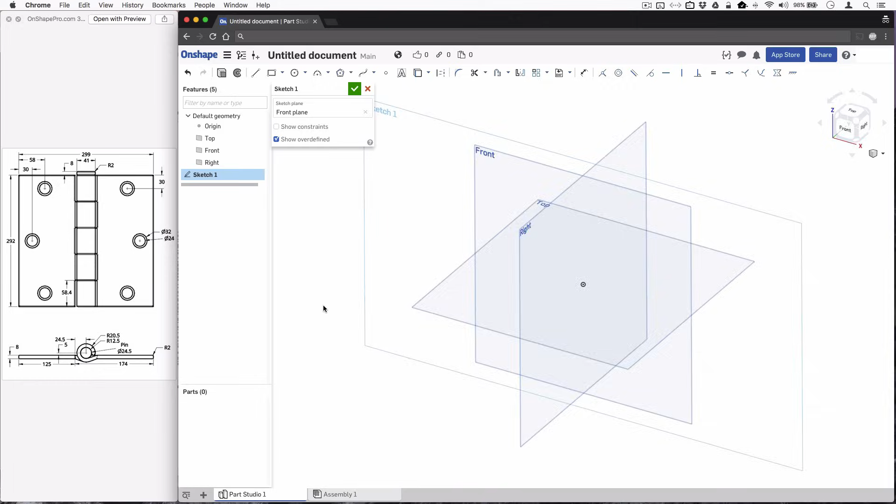Today I'm going to show you how to create a hinge using OnShape. Start off by creating a new sketch on the front plane. I'll right click, select View Normal to Sketch Plane. Select the line tool. I'll draw a few lines here.

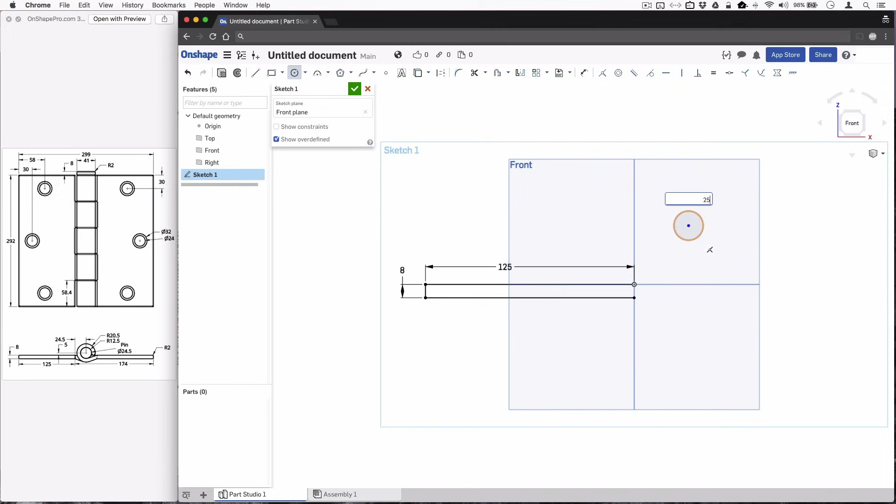Give them some dimensions. See here, 125 is the dimension of our top line. 8 millimeters on the side here. I'll select the circle tool, and we're going to draw the circle right here. First circle is 25. Second circle is 41.

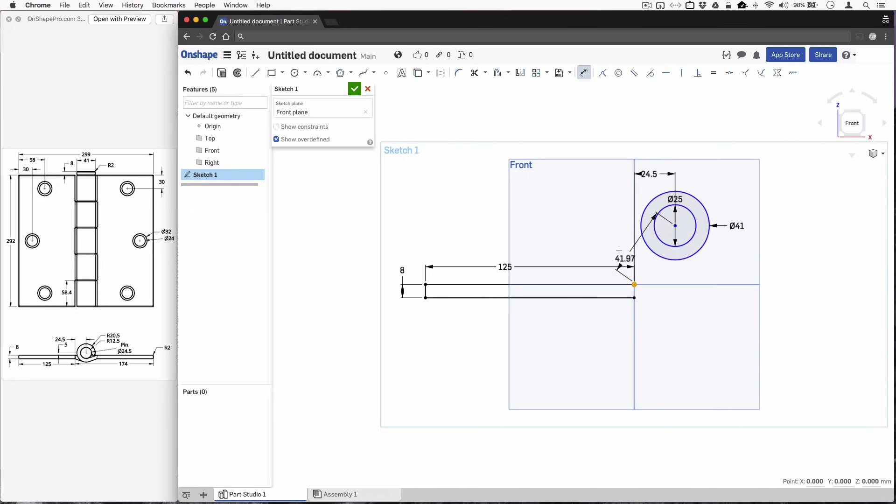I'll give them some dimensions here. So 24.5. We could see the other dimension right here is 5. I'll add some more lines. Add a line right here. And then 2 more lines about in here.

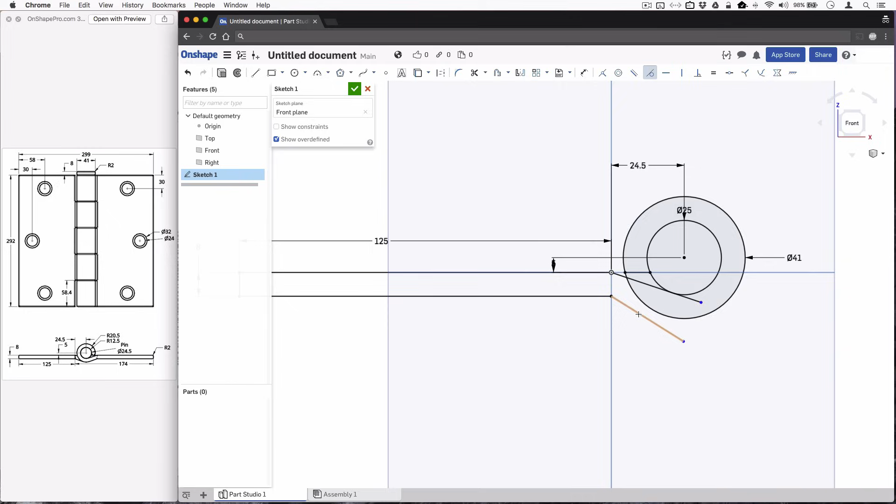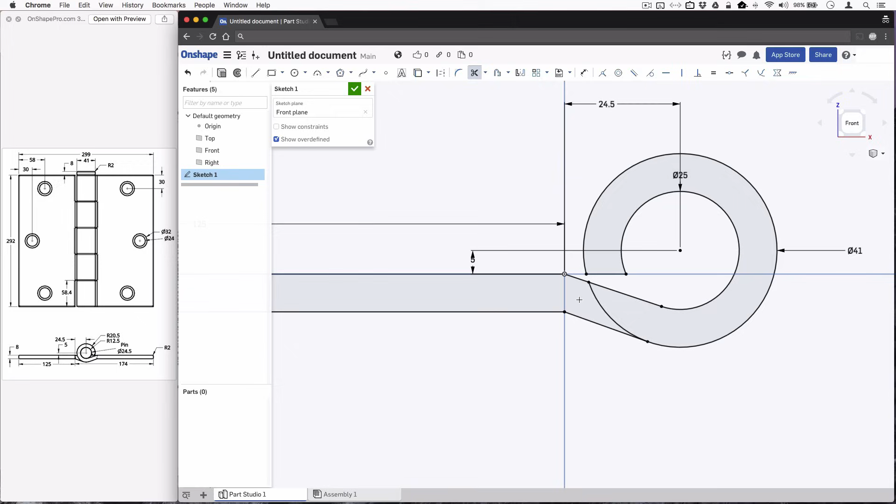Select the tangent. Make this line tangent with this circle. This line tangent with this circle. Select trim. Trim that line. Trim this line. Trim them 2 tails. And we wouldn't need to trim this one before we extrude, but we're going to go ahead and trim it. Make it a little more clear.

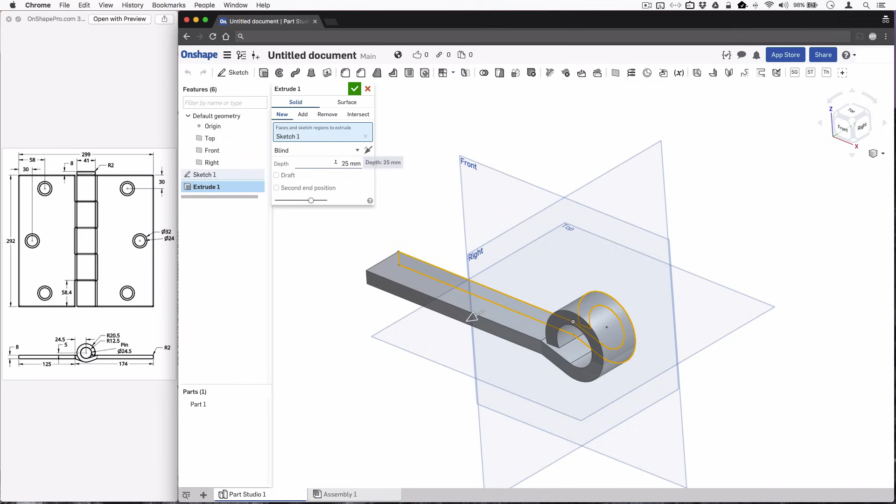Now we can go ahead and extrude this. And we're going to extrude it to 292 millimeters. And you can start to see one side of our hinge take shape here.

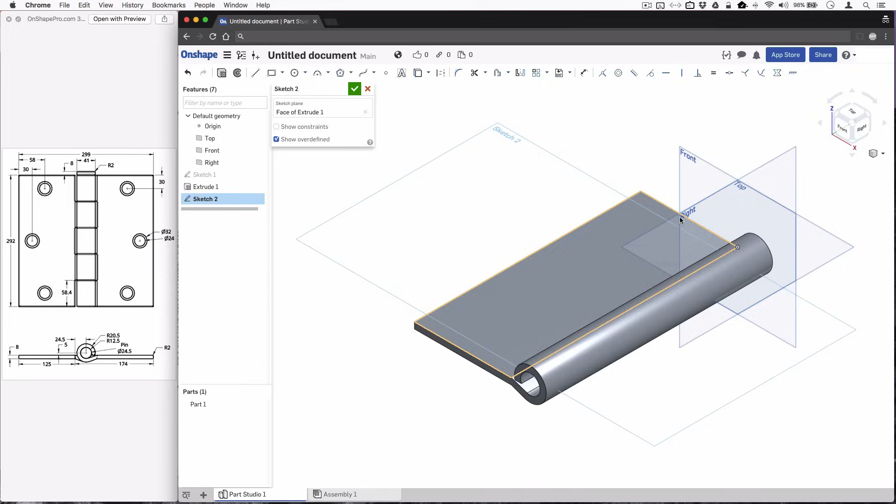I'll start a new sketch for the holes. These holes have 2 dimensions. The bigger hole is 32, which is what we're going to start with. I'll select the circle. 32. And for this one, we need to find the center.

So we're going to select the line tool and construction. And right there where the square shows up as the center, put a line across there for a guide. Go back to the circle tool. We'll draw a circle right on that line. Dimension that at 32.

Oh, well, that was construction. We didn't need construction there. Turn that off. We can right click on it and select construction. Turns it back to a normal line there. Now we need to make another line down here on the other side, and we're going to use mirror for that.

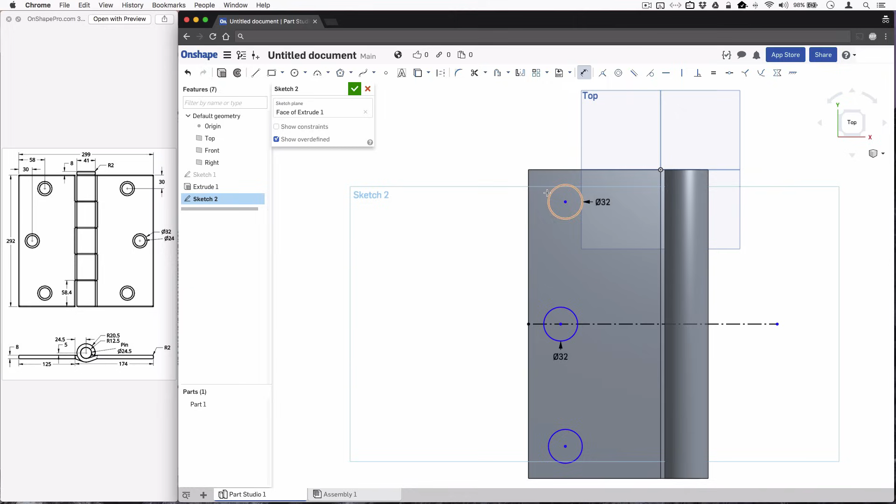It says select a mirror line. Use that construction line we created. Select entities to be mirrored. Select the circle. Now we're going to give them some dimensions. You can see from our drawing here it's 58 millimeters over from the side. So you'll go 58.

And we can see here it's 30 millimeters down. Here to here. 30 millimeters. And this one here is also 30 millimeters over. So give that a dimension of 30. Now you can see all the circles turn from blue to black. That means they're fully constrained.

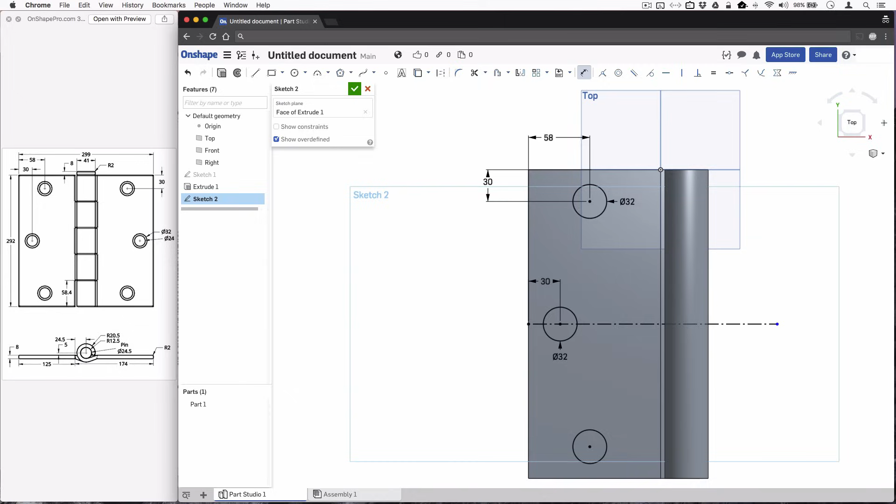And now we can stop this sketch. We'll flip the hinge over. And we'll start a new sketch on this side. And select use because we're going to use the center points from the previous circles we drew. And select the circle tool. And the smaller circle on this side is 24.

So dimension that at 24. Dimension this one 24. And our third one. And you can see them turn from blue to black once they get dimensions and they're fully constrained. This one is also 24. Stop that sketch.

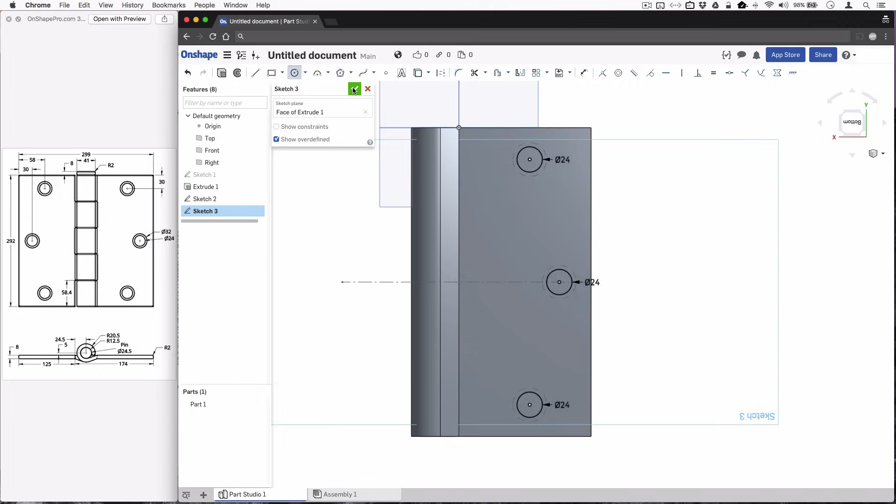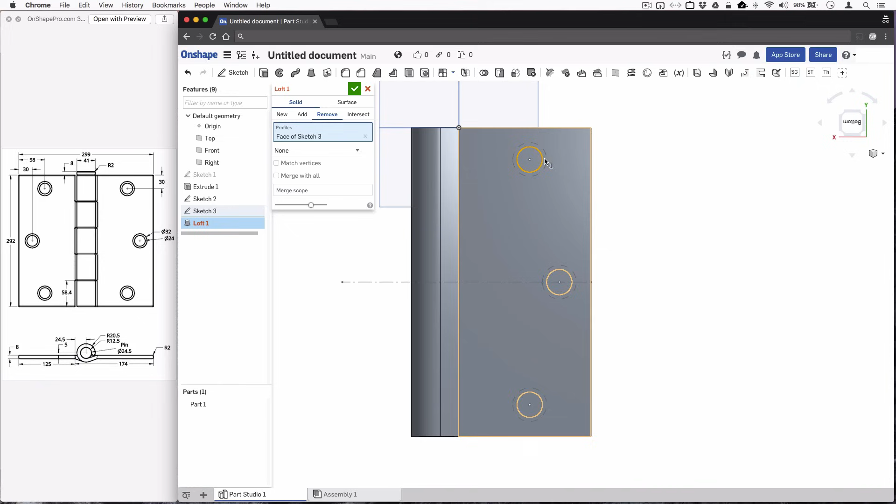And now to make the holes, we're going to use our loft tool to cut and remove. Use remove here. Select this circle. There's a couple ways you can do this. You can select this circle and then you can flip it over and select the other circle. And you can see it cuts a hole there. Turn our sketches back on.

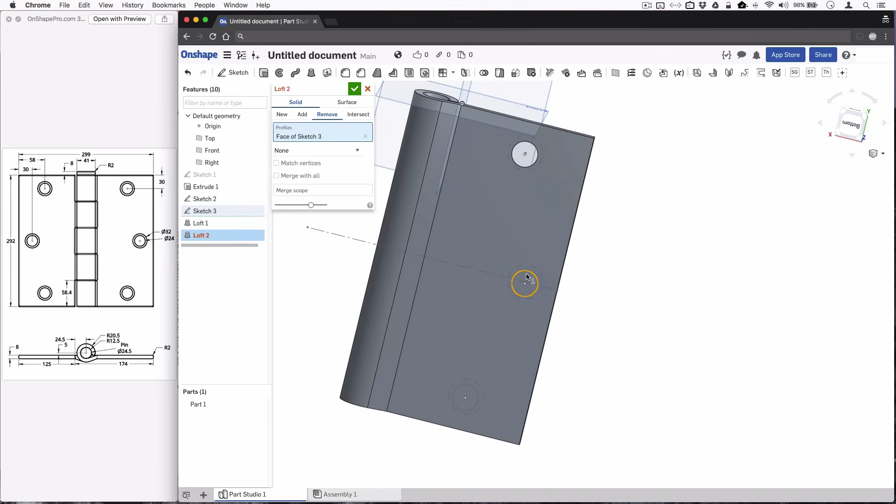Or you can do it without flipping it over. Select the loft tool, remove, and select our smaller circle, which is on the side that's facing us. And then you can right click, select other, and then go through here until it selects the circle. That's the circle right there we want. We don't want any of these other ones.

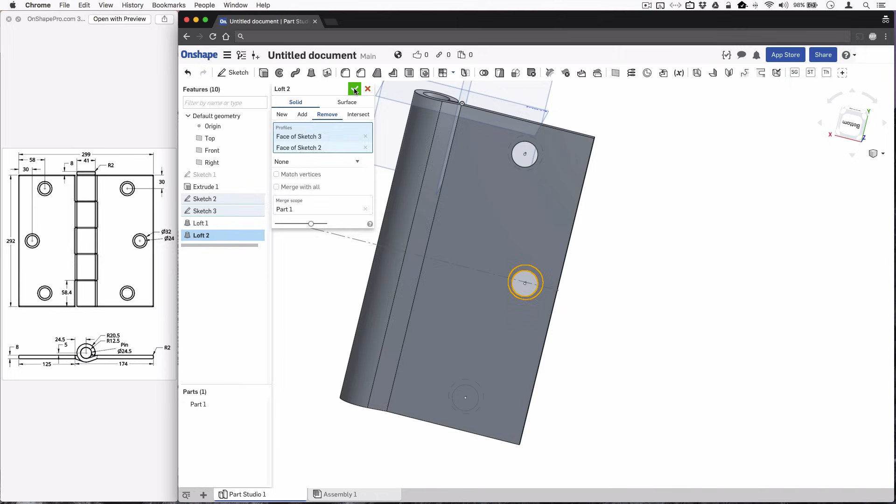Face of sketch 2, select that. Green check on our circle, and then you can see it cut it the same way there without flipping it back and forth. I kind of like just to flip it back and forth. Seems a little easier at this point. Remove, we'll do the last one here. Circle, this circle. Okay. And you can see we got our one side of our hinge with the 3 holes.

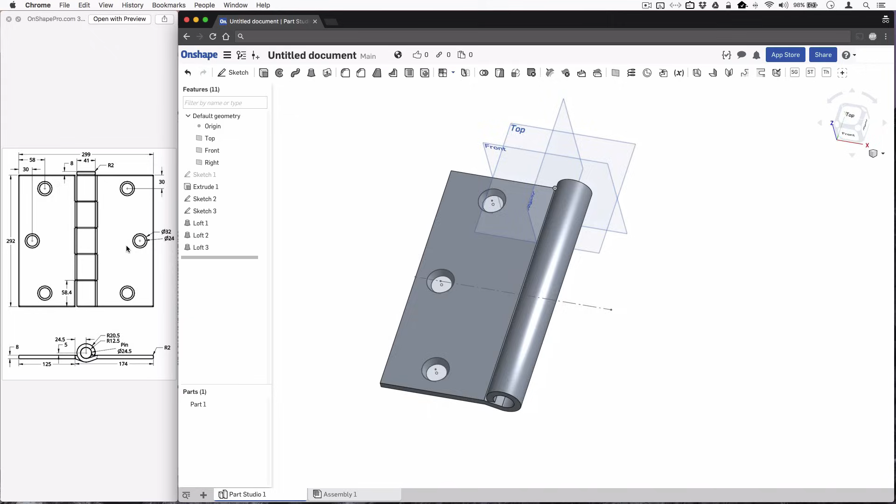And we want to make the second one, which will be a mirror of the first one. So I'm just going to right click on this plane, select offset plane. We're going to offset a plane at 150 millimeters. We're going to use that to mirror this part. Click OK. And we'll select the mirror. This part, mirror plane, plane we just created. Okay, now we got our 2 parts.

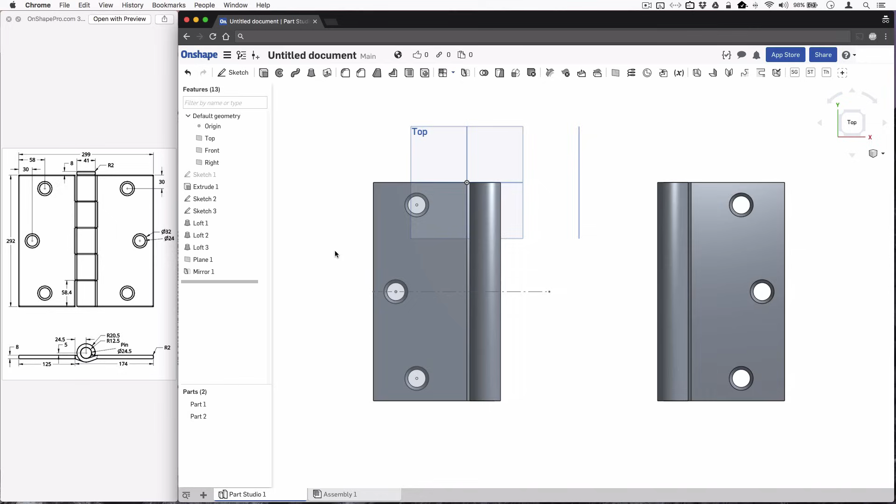We'll start a new sketch on this face here and select use. We're going to use this line for guide. Select that, and same on this hinge. We'll use that line for guide. And we're going to select corner rectangle. Draw a couple of rectangles here, 3 on this side. 2 on this side. We're going to use these for our cutouts.

And we'll give them some dimensions. You can see here 58.4 is the dimension on all of these. So I'm going to go 58.4. I'm going to do select all, copy, enter. So I can just paste that dimension in each one of these. 58.4, enter. Again. Just paste that in. Makes quick work. Paste, enter. And I'll do that over here too.

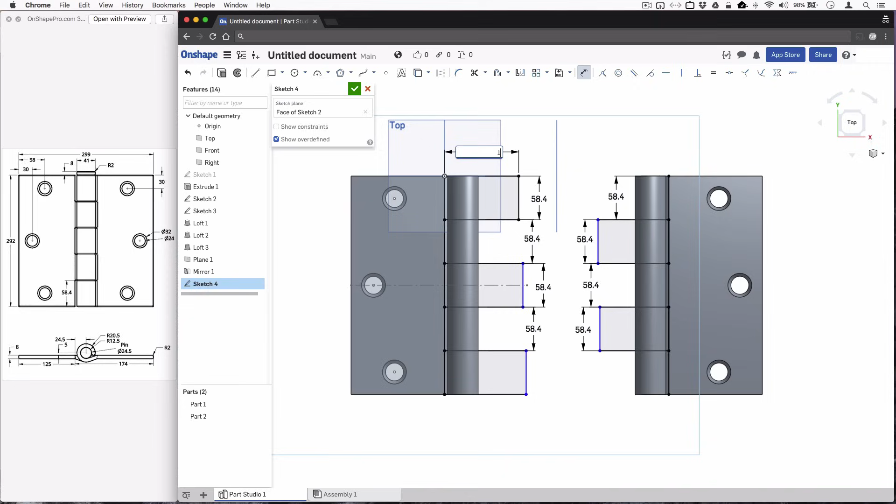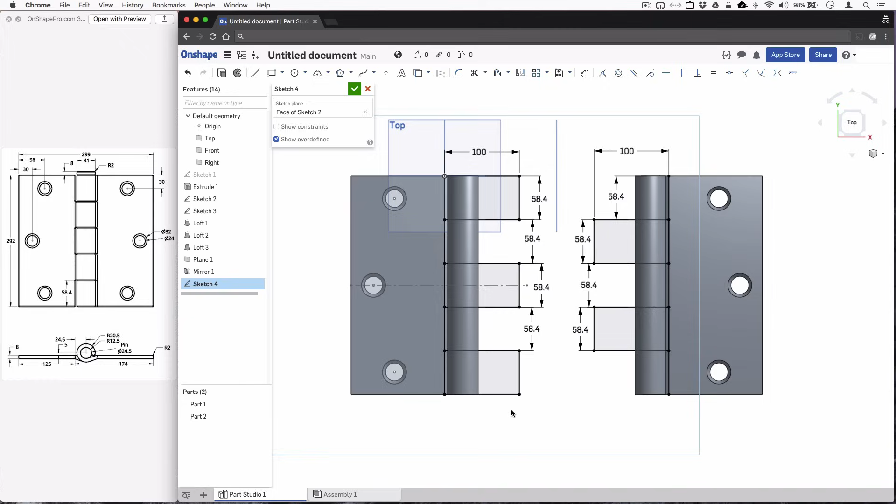So we want to dimension this top here. Let's give it 100 millimeters. Same over here, 100 millimeters. Deselect the sketch tool, and then we'll just drag this here to reference. Now that's dimensioned, fully that one there. Now our lines are black, and we just got this one here left. I'll drag that up. And now this sketch is fully dimensioned. All our lines are black. Give it the green check.

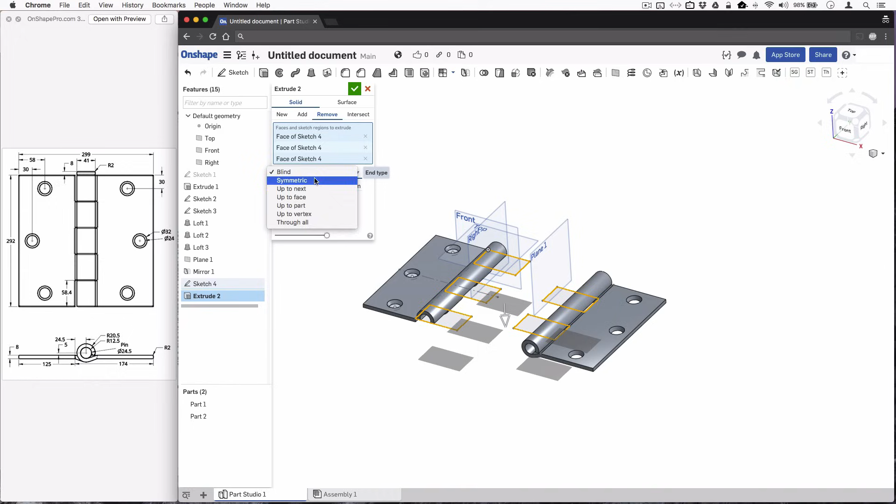And I'm going to extrude this one, this one, this one, this one, and this one. And we want to remove, merge with all. And let's go with 100. And right now it's just cutting down blind, so we're going to do symmetric, so it cuts up and down from our sketch that was in the middle there. You can use this slider here to see a preview of before and after. Looks like we got it all there. We'll click OK, green check mark. And now we have our two parts.

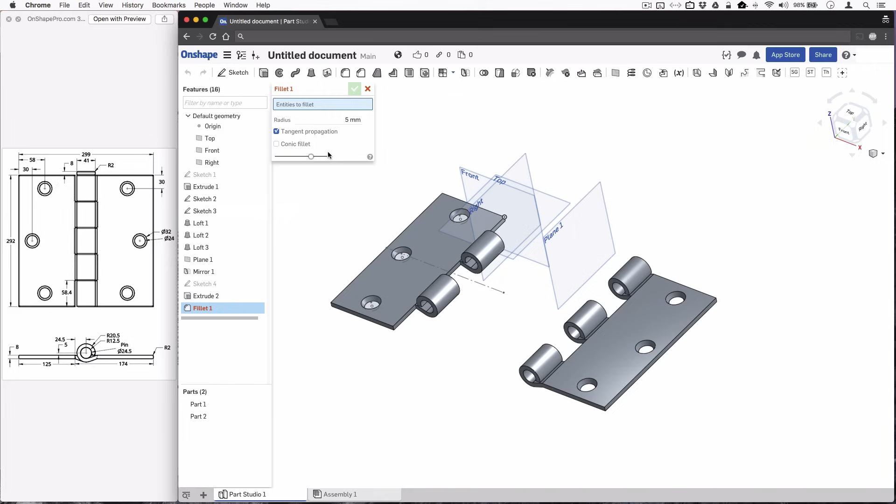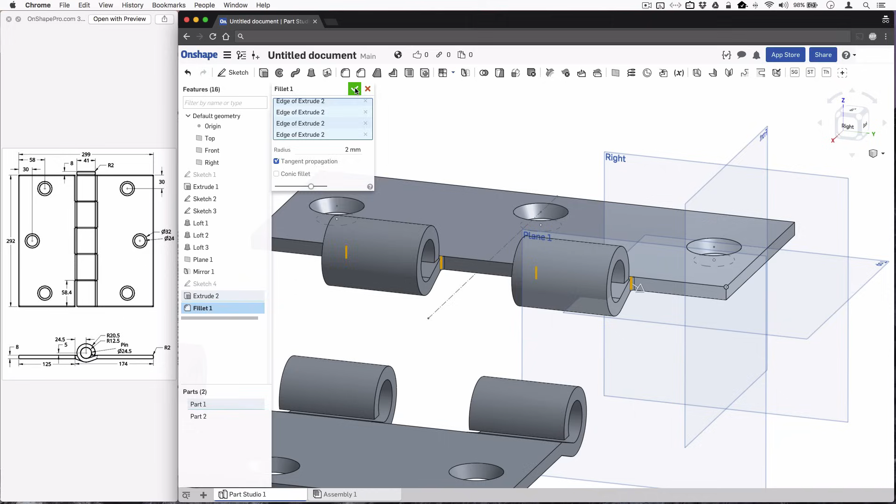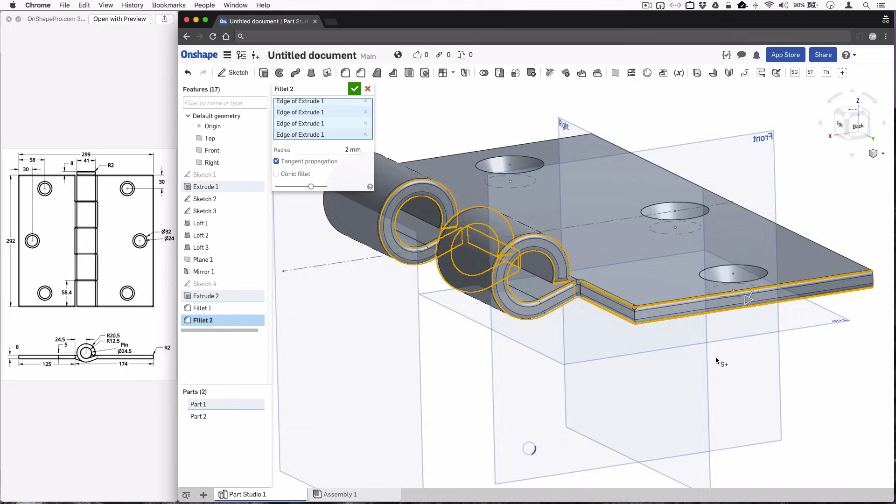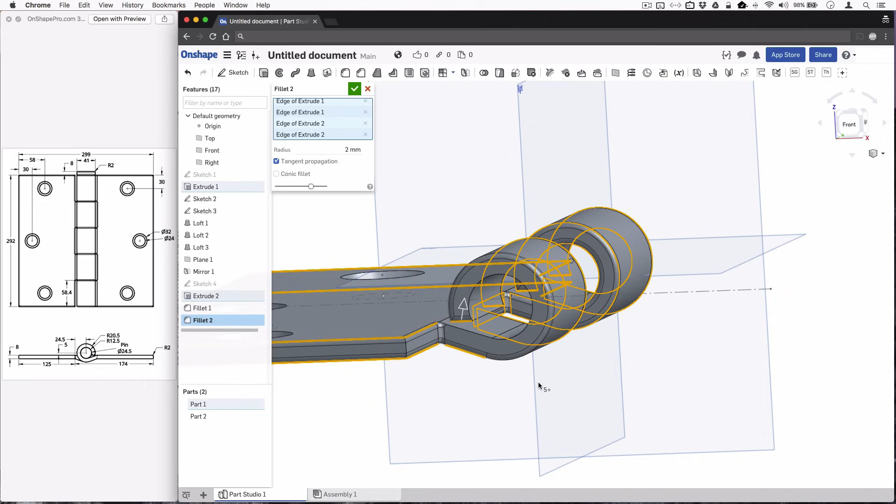We'll select our fillet. See, our fillet is 2, gives us 2 millimeters. And I like to do this in a couple sections here. It seems easier to break it up than to do it all in one step. Go 2 millimeters. Now we can get the rest of it here. This part takes a little time. Looks like we got everything there. Click the green check mark.

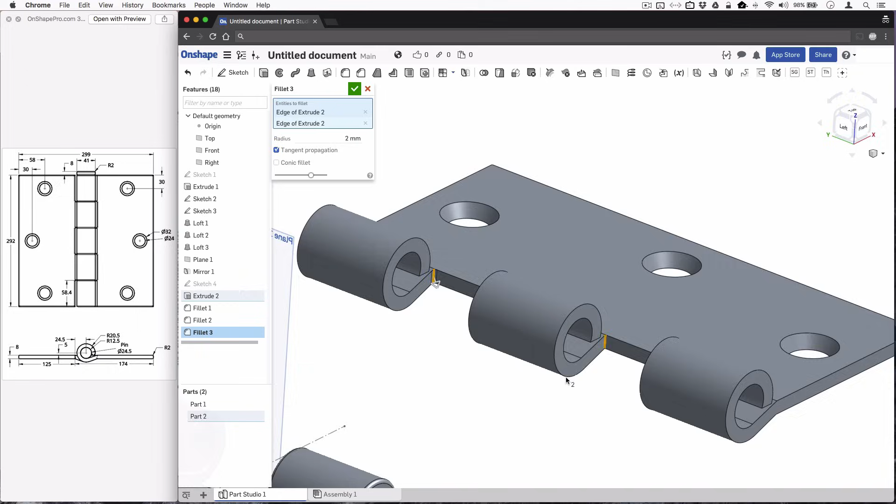We just rotate around it one more time. Looks like we got it all there. We can go over to the other part. Do the same thing. 2 millimeters. Just like to get these inside pieces, inside lines here. Green check mark. Once again, 2 millimeters. It's kind of nice if you can position the part so you can click a lot of these lines without having to do too much moving around.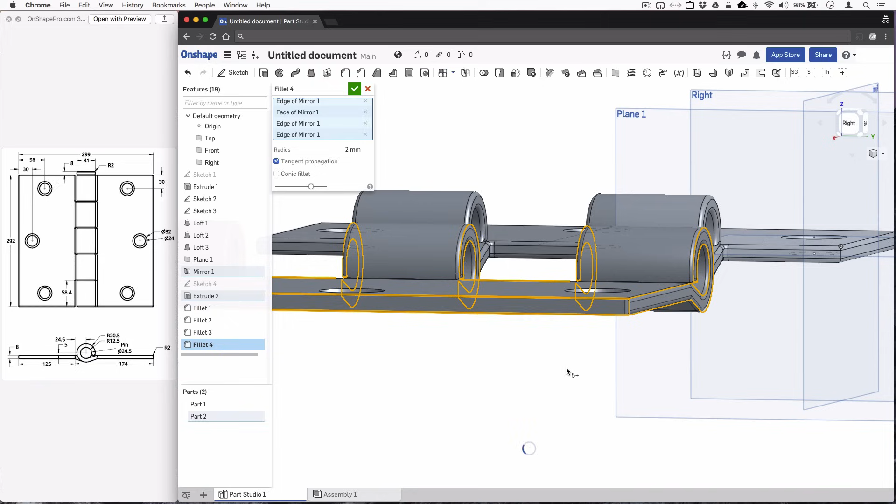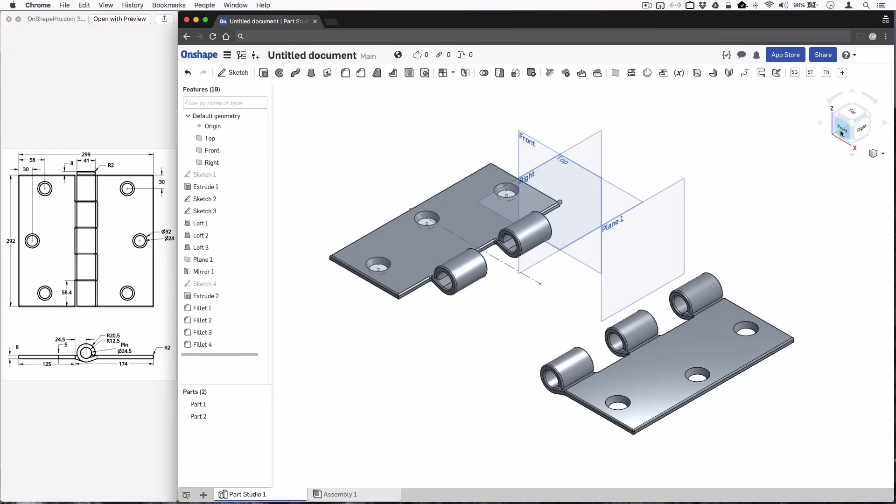I think we got it all there. Click the green check mark. Take a look at it. Looks like we got all the edges there. Click the cube up here. And let's take a look at the front view. Well, I'll put these two pieces back together now and create the pin in the middle.

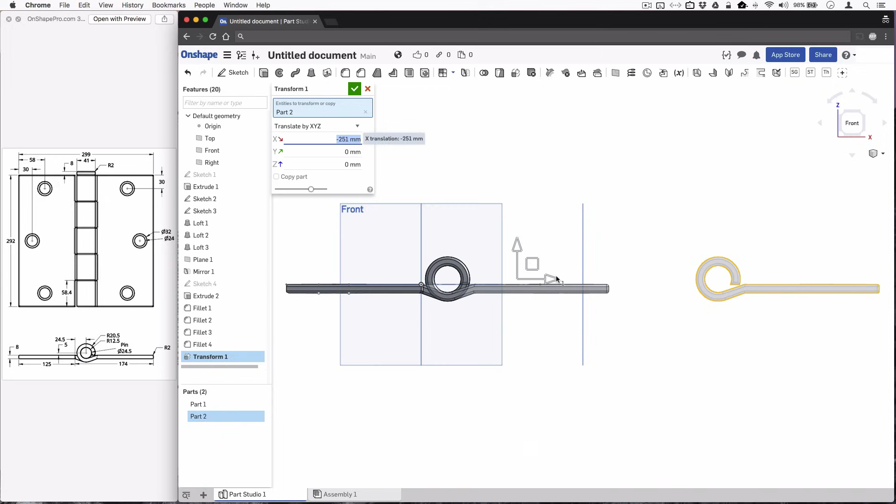So now we're going to go up here and select transform. Select this part and XYZ. We can grab the arrow here and drag it over. And you can get it lined up that way. Or you can go up here and enter a dimension. I know from doing this a few times that it's 251 millimeters. So enter that in. That'll put our two pieces together. Click the green check mark. And see where we're at here.

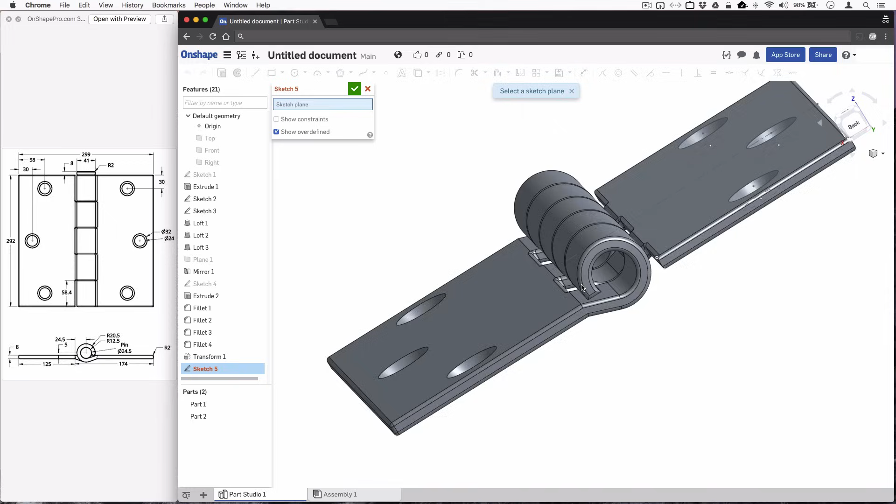We don't need this plane one anymore, so I'm going to turn it off just to make things a little clearer. I'll click the eye there. And don't really need these other planes here right now, so I'm going to use the P shortcut on the keyboard and get rid of them. And we're going to start a new sketch to create the pin. And we're going to start a sketch on this face right here. And I'll select the circle tool. And we'll find the center of this here. I'll wake it up. There it is. And see, this pin has a diameter 24.5.

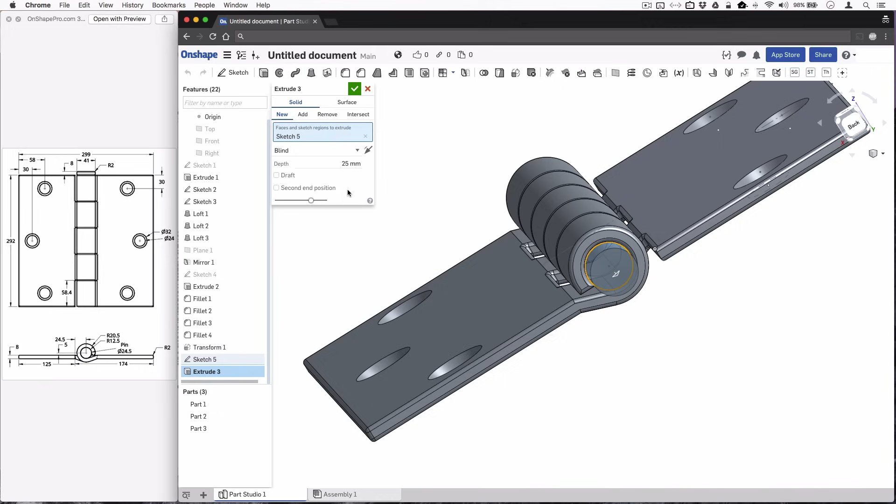And we can just go right into extrude here without clicking the green check mark too. So we're going to do that on this one. And we can see it's extruding the wrong direction, so we're going to click the arrow here. And the length of the pin is the length of the hinge, 292. Enter 292 millimeters, enter. And we now have our pin. Goes from one end to the other. You can see that by turning off the other parts here. Click the green check mark.

And now we're going to create the head of the pin. Start another new sketch. Select the surface of the pin. Select the circle. Find the center there. And that dimension is 41 millimeters. So enter 41, enter. And then either click the green check mark, select extrude, and what we want to extrude there. But it's kind of a shortcut just to click extrude right away.

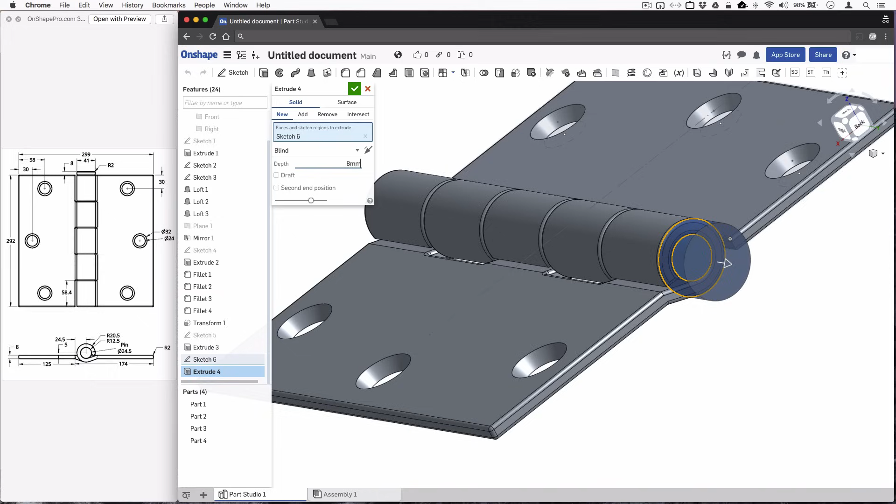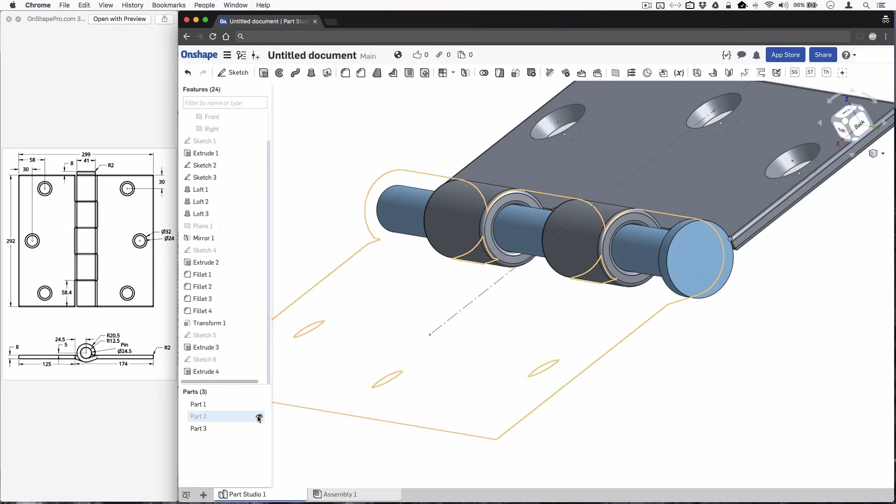And we can see the height of that head is 8 millimeters. So we're going to enter 8 millimeters here. And you can just enter the number like I've been doing, or you can hit 8 mm, whatever works out for you. And we want to add that to the body of the pin we created, which is part number 3. Click the green check mark. Now you can see how that's joined. And we'll finish it up here.

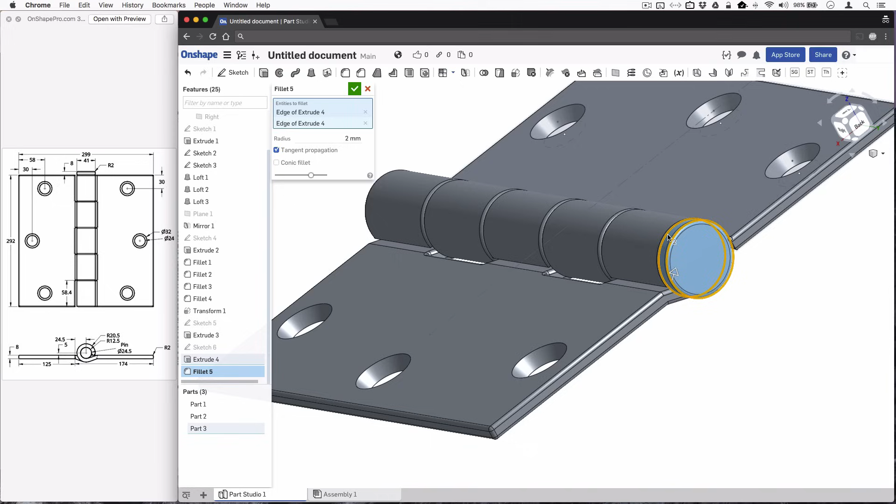Click fillet. And that 2 millimeters. Add a fillet there. Fillet there. Come down to the end of the pin here. And our last fillet right there. Click the green check mark. Change our view. And we are finished.

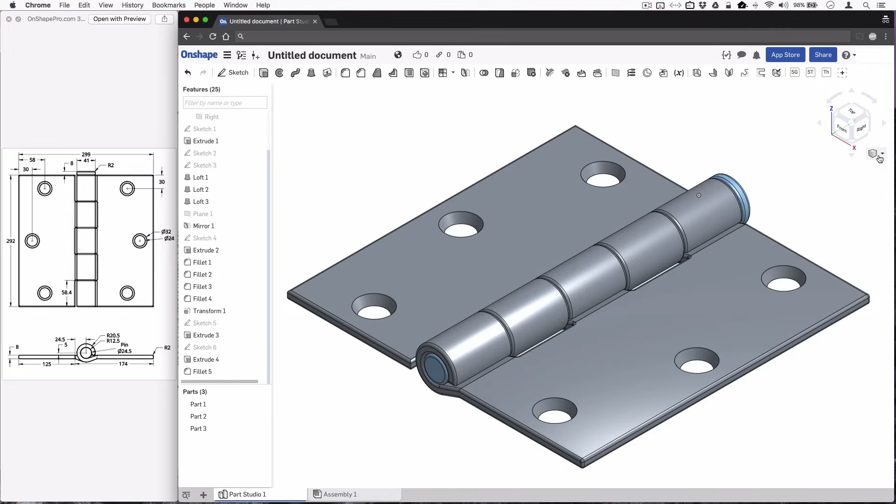See, we still have a sketch on here. We can turn them off. A couple sketches. Take a look at it there. Looks pretty good. Change the views here to see. And that's the end of it.